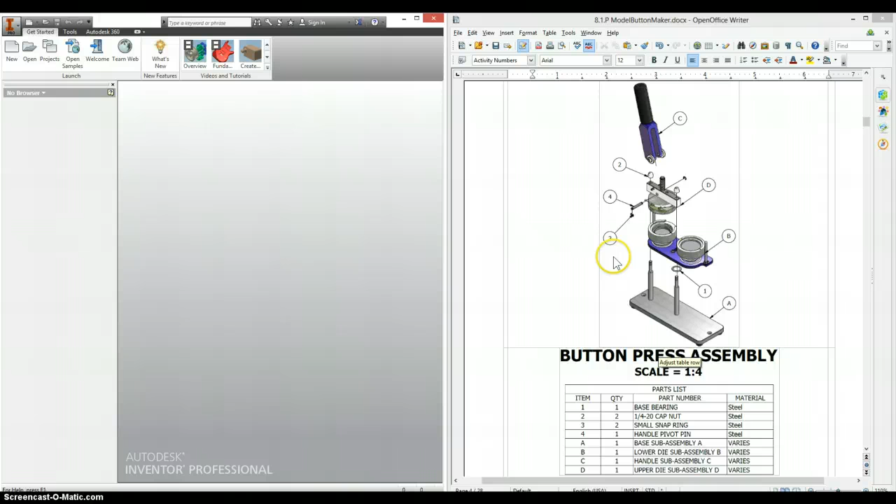Now it's time to put together the button press assembly, and this uses a lot of the sub-assemblies that other people in your group have made. It's important that if you get these on a flash drive, you don't just get their assembly file, but all the different parts that go into that assembly file as well, because your assemblies are referencing other parts that you've created, and if those part files are not in the same location, it's going to give you errors and mess up, and it will be a headache for your group.

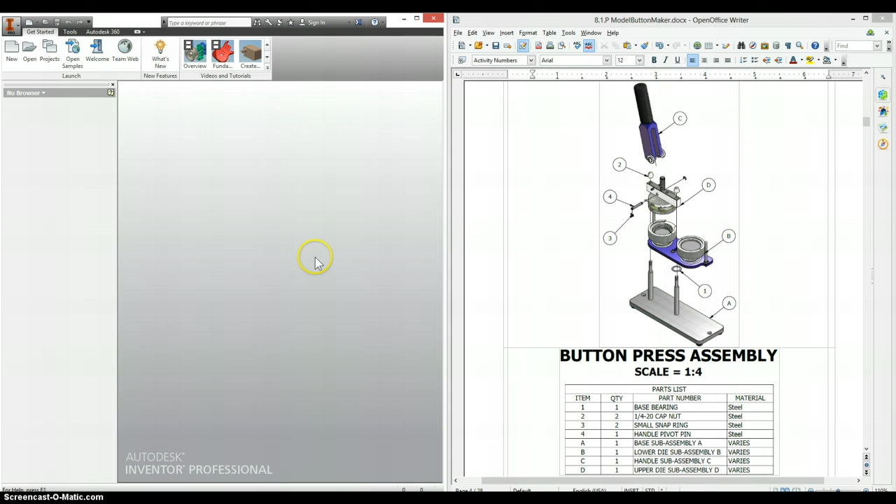So make sure that all of the pieces for the assembly are transferred with the assembly. Some of the other pieces, like the handle pivot pin, someone in your group made. Small snap ring, quarter 20 cap nut, and the base bearing, I made all three of these pieces for you. You can find them in your stock button maker parts folder. So without too much more, let's go ahead and get started.

New, assembly, place, and I'll get the number 1 quantities first. So I have a base bearing ring, then a handle pivot pin. That is something that I made. So hold down Control and click handle pivot pin. The base subassembly,

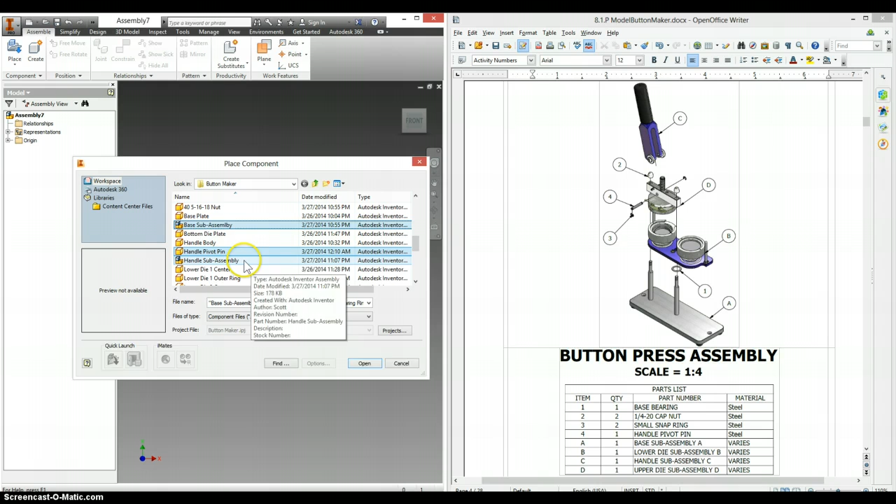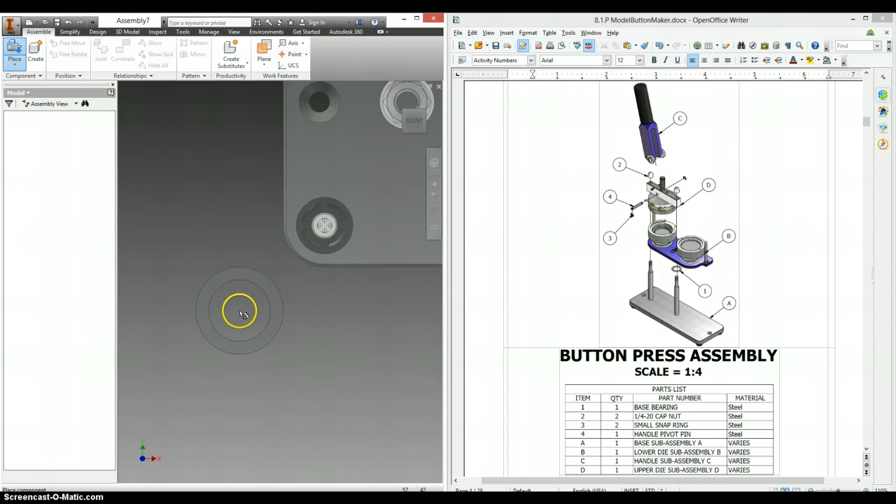Handle subassembly, lower die subassembly, upper die subassembly, and are there any other subassemblies that we missed? Nope, should be all of them. Click open. Right click, select OK. We can drag these out, and now even though these are multiple pieces, they're being treated as one part file.

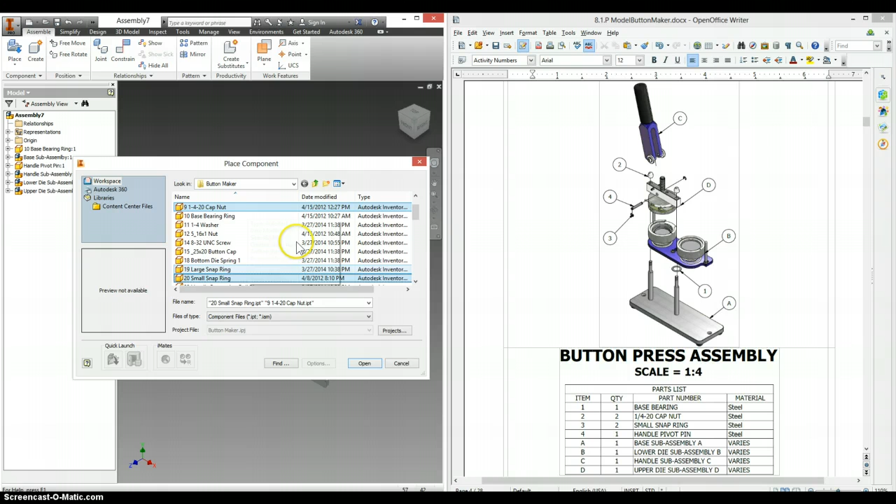Okay, for our 2s, we have a quarter 20 cap nut and a small snap ring. So go back up to place. Quarter 20 cap nut is here, and then your small snap ring is here. Again, hold down Control so you can select both of them at the same time. Open, click twice, right click, say OK.

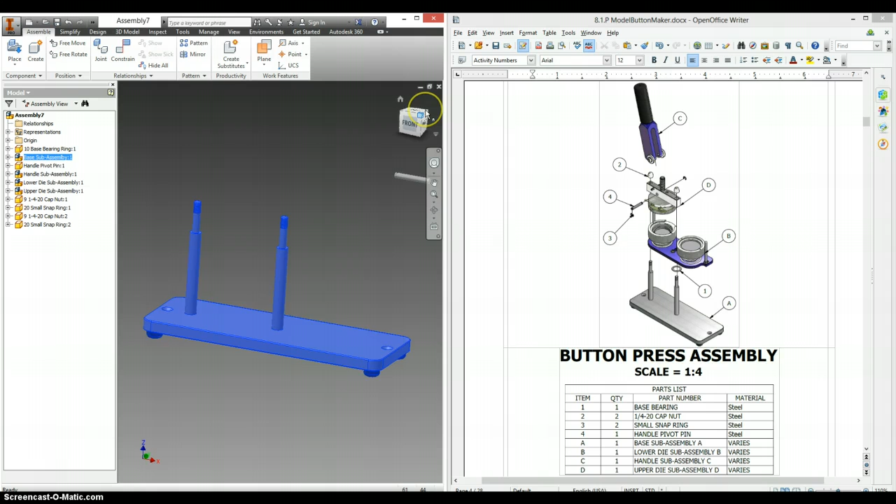I want this to be oriented upward, so I'm going to click on front view, flip it up once, right click and say this is my new front view. Click on this top corner here, right click and say this is my new home view, fit to view.

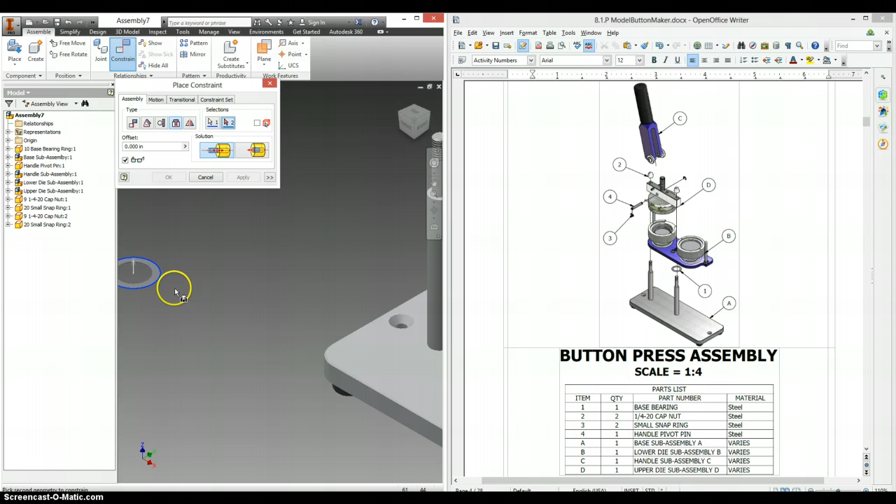And now that we have that in place, we can start to put on other things. Just like before, we have the insert constraint as our favorite one to go with here. So we have the insert, click on an edge, click where it should be going, make sure it doesn't go through the material, flip the alignment if you need to, select apply.

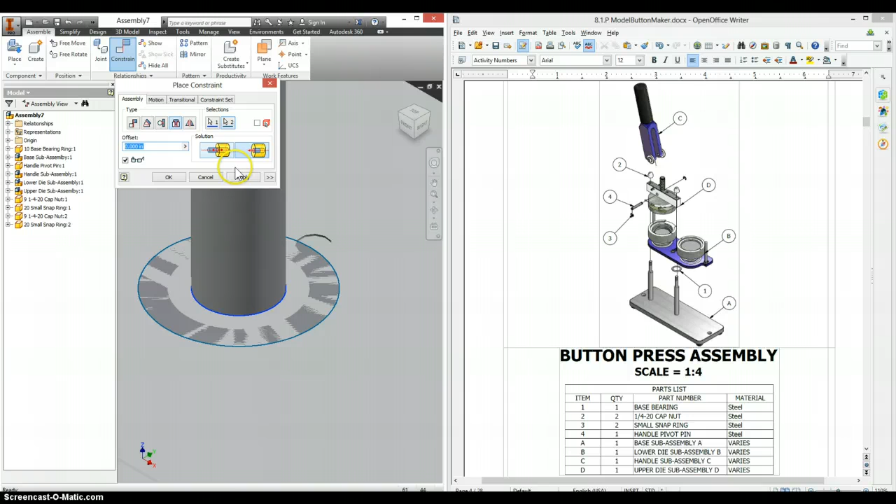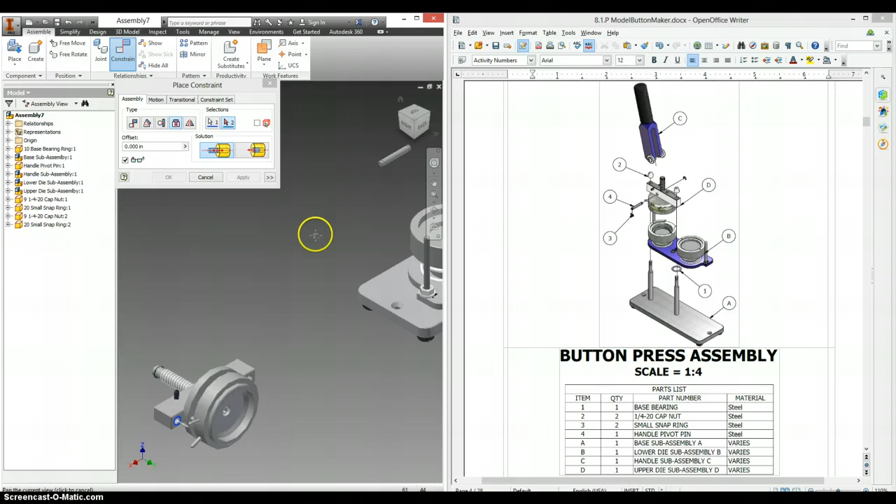This is going to sit on top of this washer. Apply. Where'd it go? This is upside down just a little bit. This is going to sit on top of here. Unless it's not.

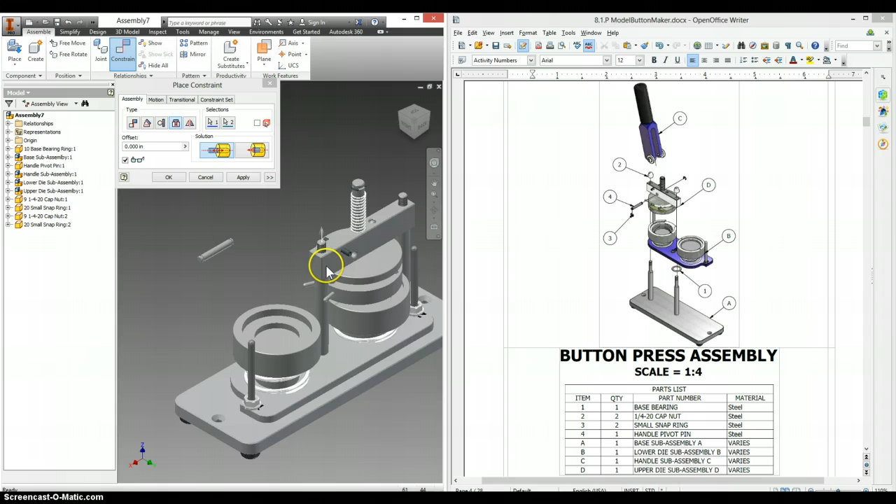Well, no, I do need to flip that. Quick thing to note is that the little antennae on this need to be straddling the other bar. So I'm going to hit cancel, constrain, insert, make sure I click on this one, and then click on the side that has the antennae on it.

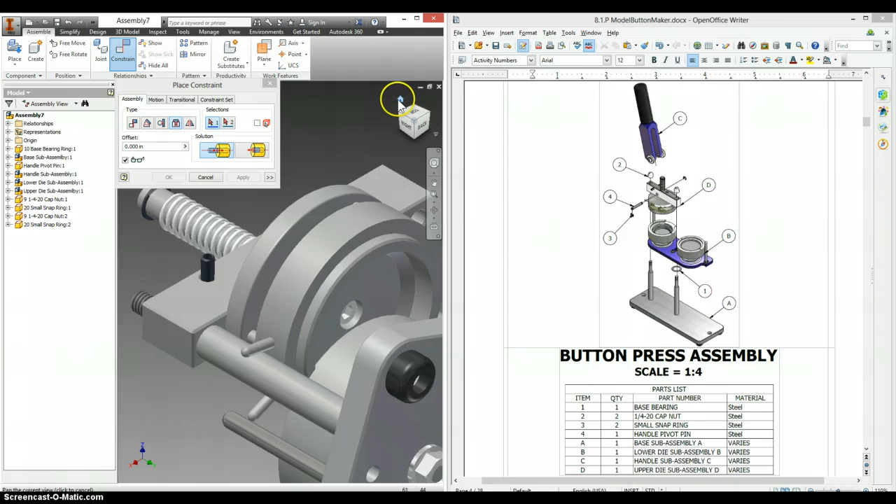Let's go back to a home view. And I thought I grounded that. Apparently not. Let me go back a couple steps. So I went through, made sure this is oriented correctly. I forgot to right click and say grounded. So let's try one more time.

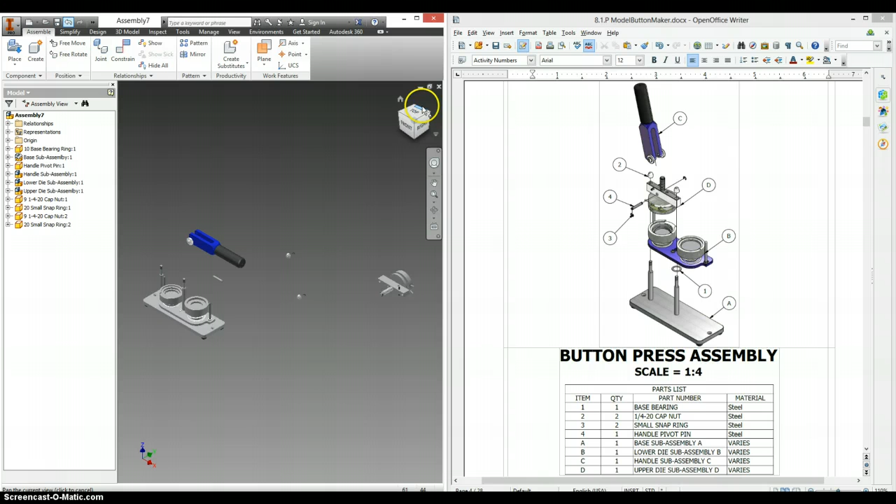Look at it from this side, constrain, insert, outside of that, top of that, apply, and the same thing with the underside here.

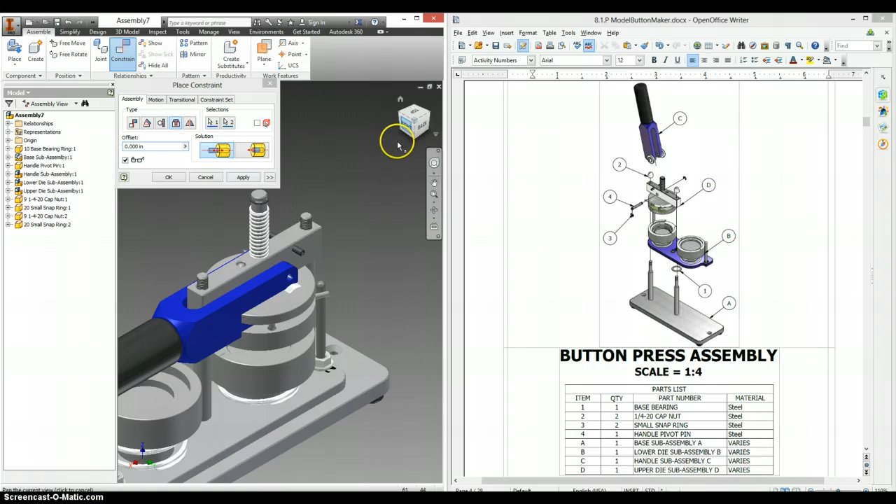This handle is going to be pushing down on this, and I do believe that this axis here is going to be lined up with this hole. Although if we look straight down at it, well, no, it looks pretty right on. Let's hit apply and then exit out for just 1 second.

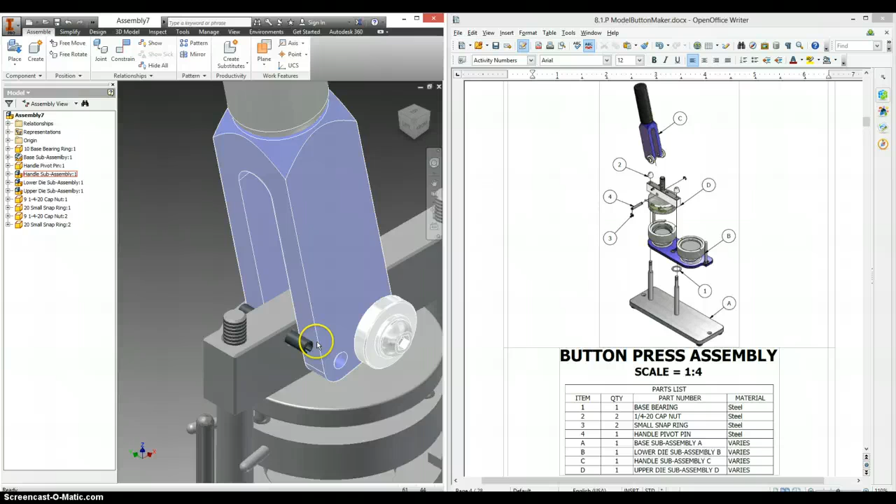We should be able to drag that up. We'll see the main function of that little black piece is not to pivot, but to stop this from going back too far. And that just leaves this little pin here and the snap rings that go on it. So the pin is here.

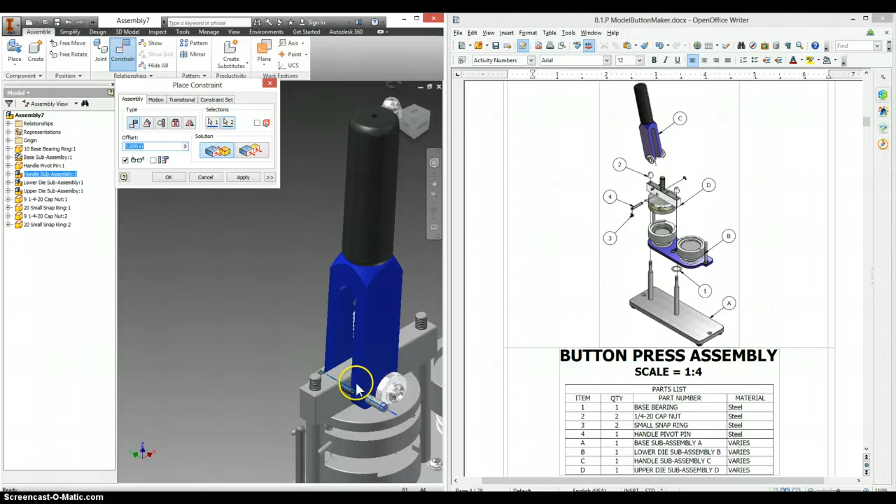We are going to be using a mate constraint to mate it into that. Apply, and then a flush constraint with the top of this. And let's see what it looks like with the side. Looks okay, I guess.

Might offset it just a little bit. 0.01 doesn't look like enough. 0.02 looks a little better. Let's hit OK there.

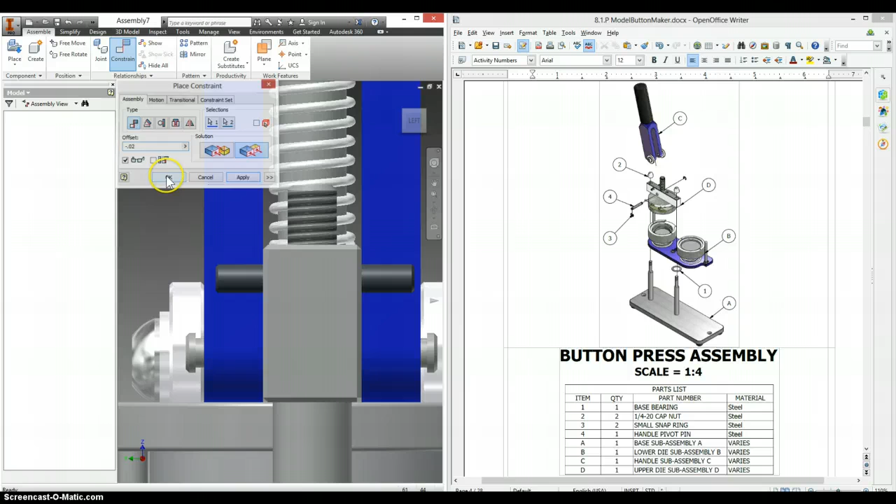We can put the snap rings on. This is an insert constraint, so switch to insert. Click on one of the faces of that. Matter of fact, to make it easier, click on the outside face. Apply.

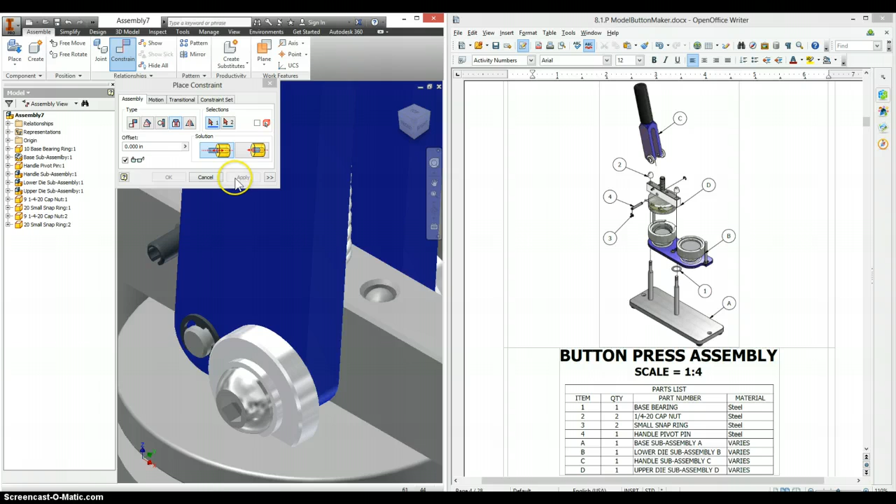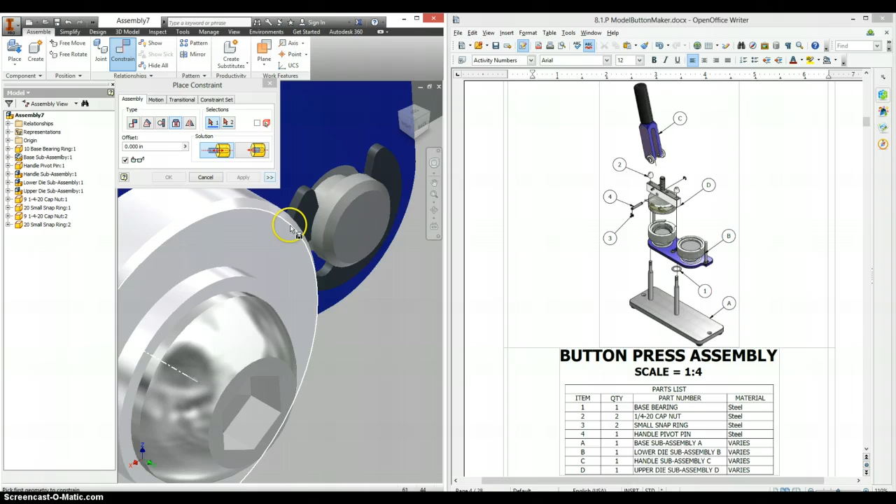Snap ring number 2. Underside of that. Apply. We have the bottom of this cap nut. It's going to be covering this. And the same thing for the other one.

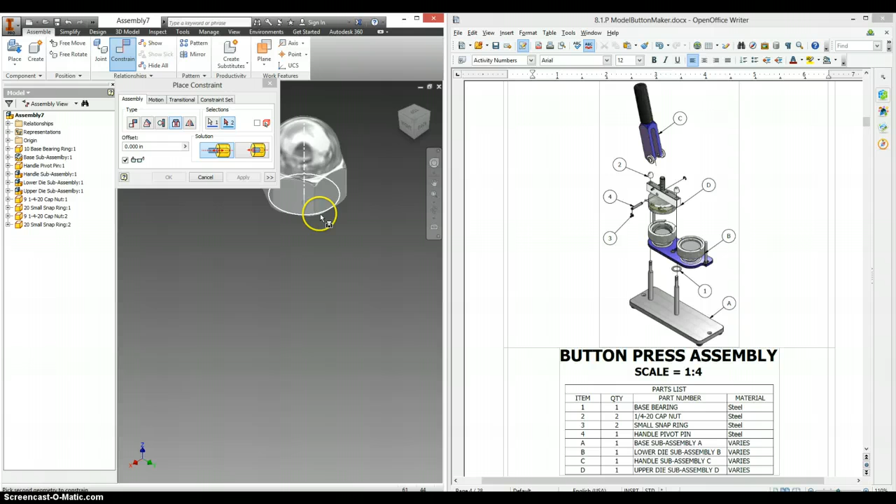There you go. And if we had these parts adaptive, this would come into contact with this and force it down. The spring would provide tension and push it back up.

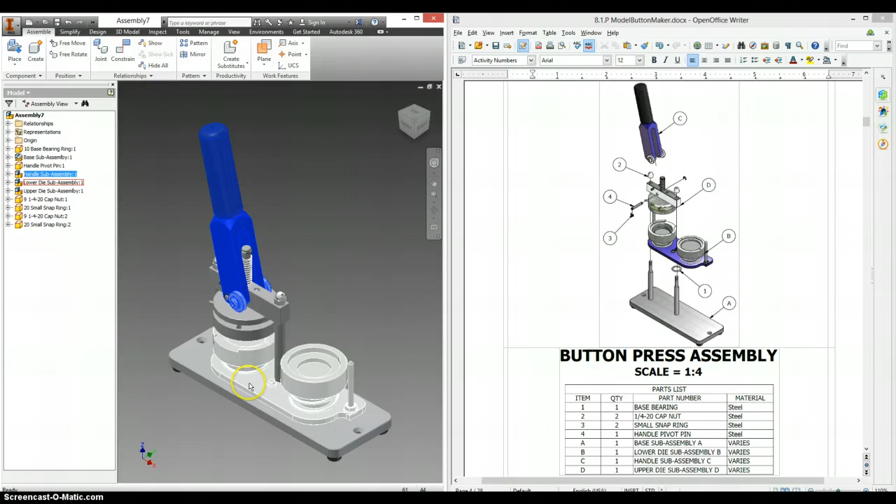Let's save what we got. We'll call this button press assembly. Yes to all. Click OK and OK.